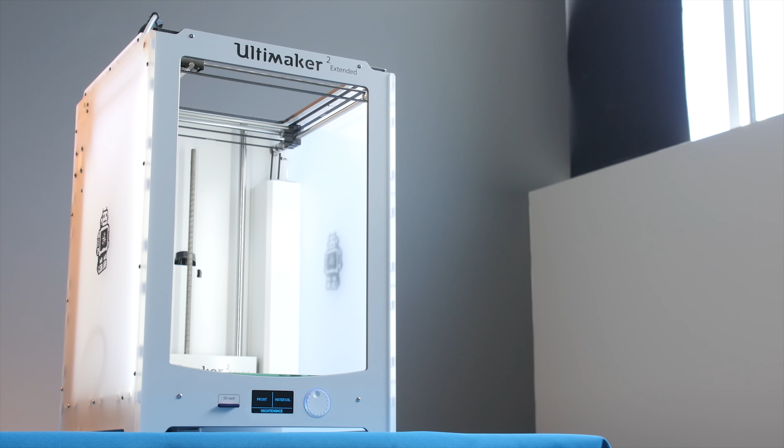We finally got our hands on a high-end FDM, or fused deposition modeling printer from Ultimaker called the Ultimaker 2 Extended. We're a little late to the game in terms of 3D printing, but that's because honestly, just printing from Shapeways was always kind of a great solution for us. Ultimaker offered to send us an Ultimaker 2, and it's kind of too badass to deny.

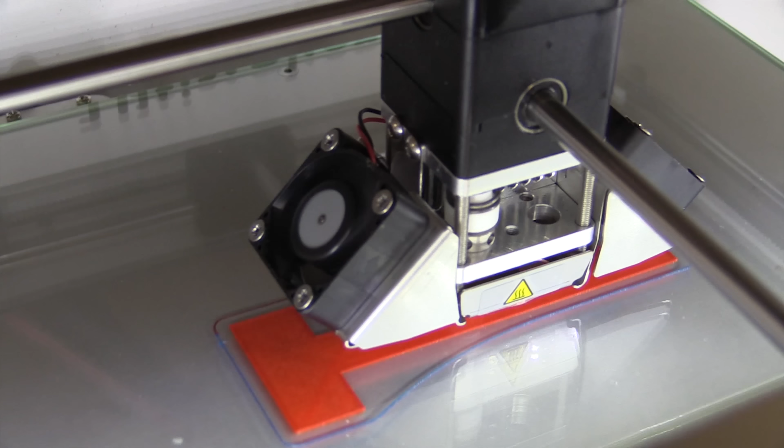So first off, what is an FDM printer? Essentially what happens is it squirts filament out of a hot end and lays down layers on layers on layers of this stuff to eventually create your modeled object.

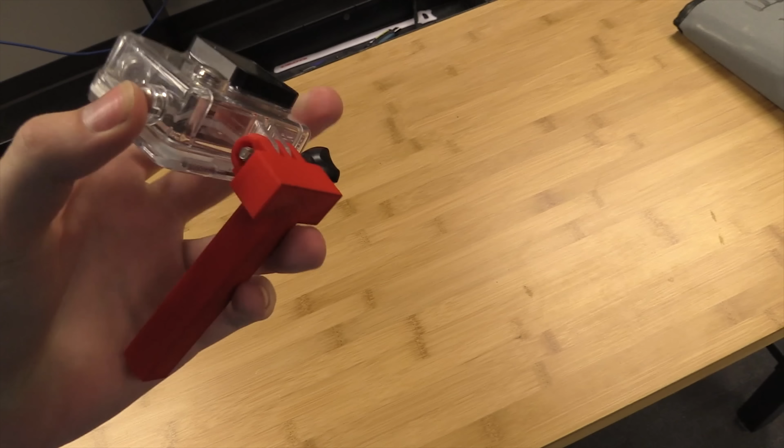This type of printer is typically what you would find for a home use style printing scenario, not necessarily industrial applications, as they would very likely have a much larger printer with a different printing style.

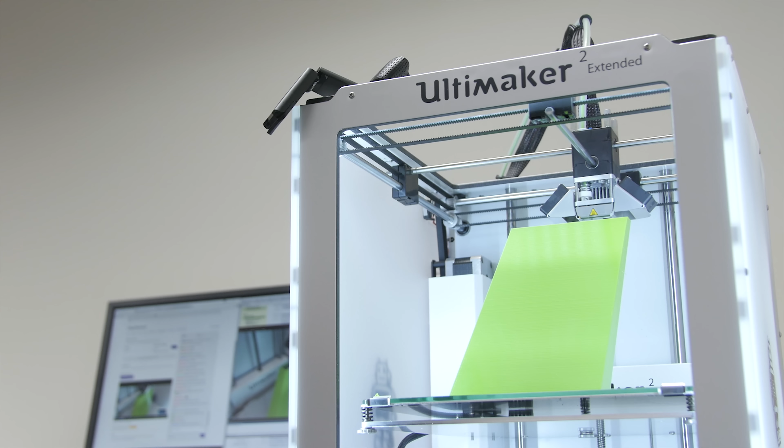That being said, this isn't a cheap printer. You could go pick up a cheap 3D printing kit for like $500, plus or minus a couple hundred. But when you get into the really fancy high-end printers like this, it can get really expensive. For example, this guy is about $2,700-ish US dollars.

With an expensive printer, you get a much bigger print volume, meaning the bed you print on is relatively large, and especially with the extended version we have, the object you can print can actually be quite tall. You also get a better print resolution in terms of speed and precision, so you'll get a better looking print in the end with less of those obvious levels from where it was moving.

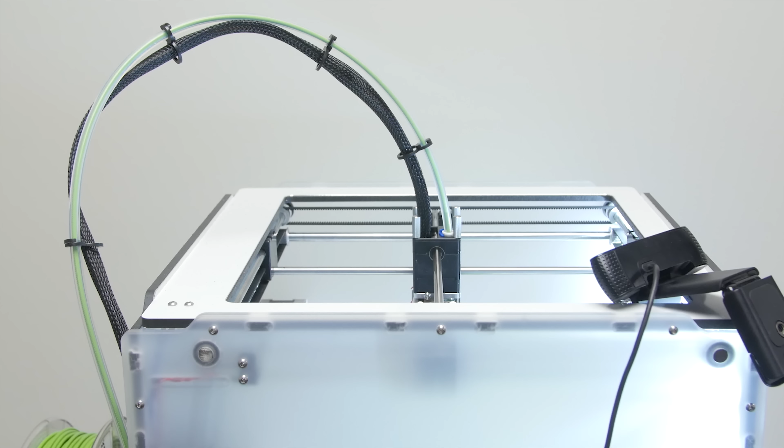You get a machine that doesn't make as much loud, aggressive noises. And then the rest of the improvements are largely going to be more subtle and hard to detect things that are actually still very important.

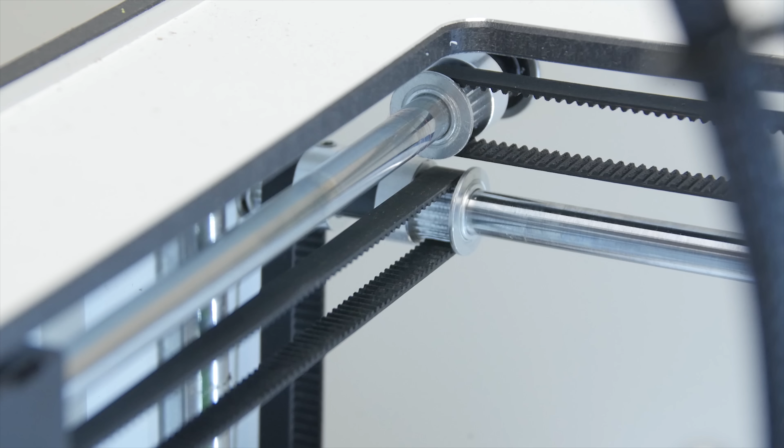Those things are like the specific bearings that were used, the hot end, the steppers, the belts and their tightness, etc., which will both contribute to the longevity of your printer and the quality of the final print.

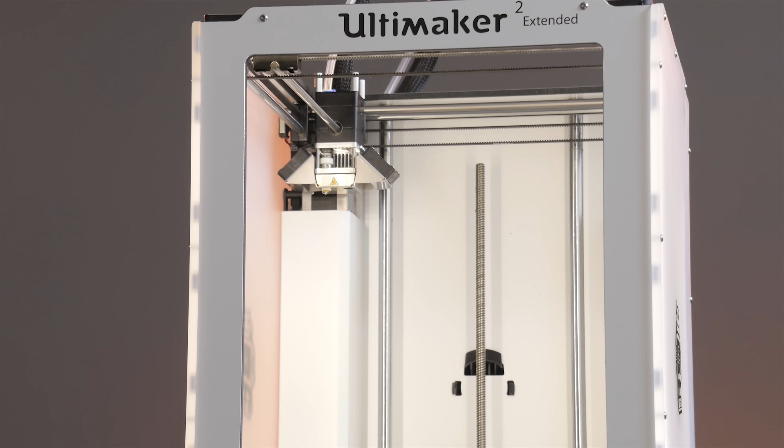I wouldn't say that the Ultimaker 2 is an entry-level printer. If it's your first foray into the 3D printing world, I might start with something cheaper, but for the high-end printing buff, this may be your target.

Now, without further ado, let's get to some printing.

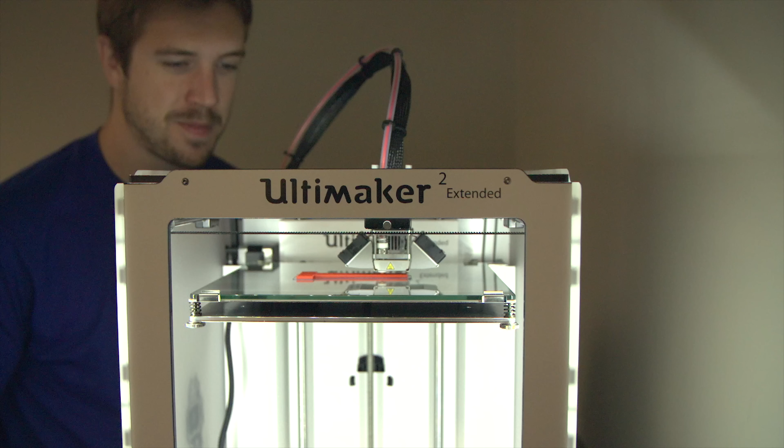The first thing I tried to print was a little GoPro handle. My idea for this was that it wasn't an overly complicated print for a first print, and it would actually be useful in our day-to-day work.

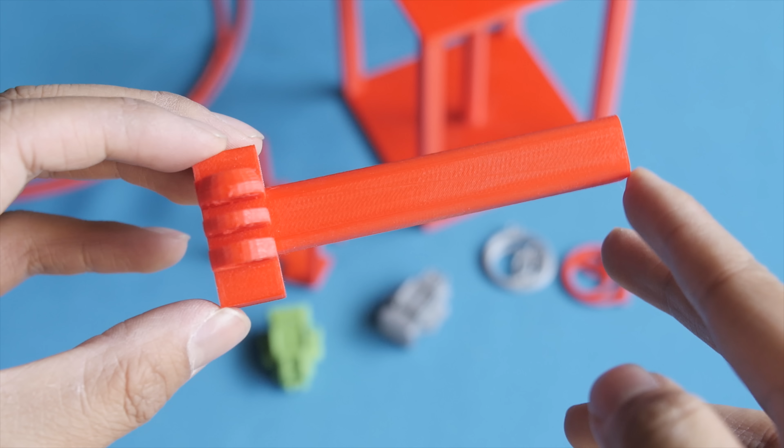On the modeling side of things, I just downloaded this model, but in the future I could just take the bit off the end that connects to the GoPro and model whatever I want behind it, so we can make specifically tailored GoPro mounts relatively quickly and inexpensively, which is awesome.

I created two of these, one at maximum quality and the other at minimum quality. The maximum quality one took just over 4 hours, minimum quality just took over an hour and a half.

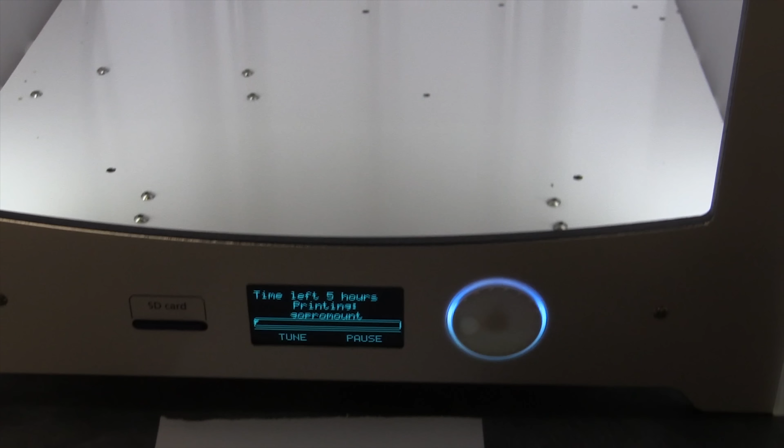One thing I'd like to note here is that the time the Ultimaker shows on itself is incredibly inaccurate, but if you're using the Cura slicing software, it will give you a pretty accurate time estimate before you start the print. Next up, we started printing the fire poles, which were conceptualized by me and then designed and modeled by Taryn.

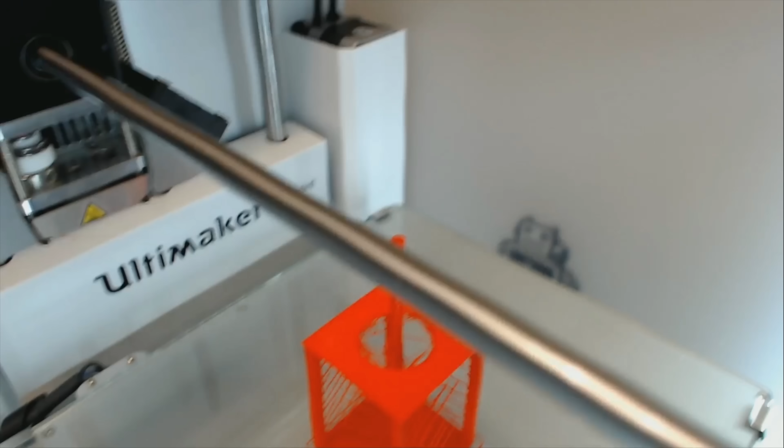The first one was a very small model that we built with scaffolding enabled. This was an interesting print because of how much of the print was extended over an overhang. The printer made quite a mess with the supports. After a very minor amount of work, I was able to cut the excess away, and the final product looked quite good, but it was still a little funky.

Next up, we printed one that was 4 times as large as the previous fire pole. This was an interesting print for a few reasons.

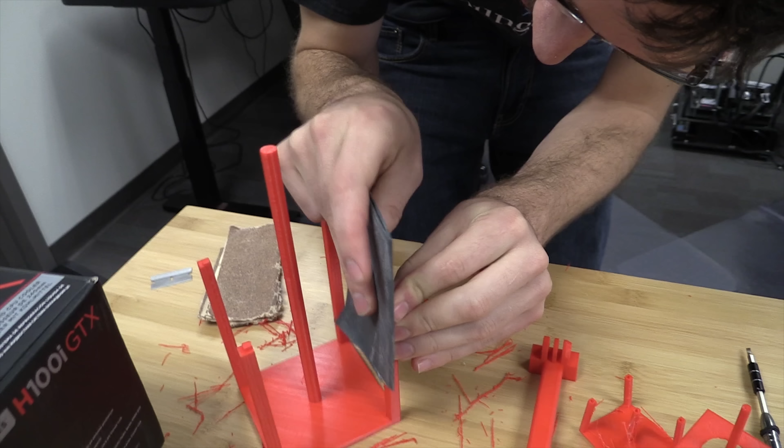I turned off the scaffolding and Taryn took the top plate off and built it on the side, which makes way more sense, while adding notches so that we could put it together later on. The reason for this was to avoid the scaffolding mess we had earlier and to see how accurate the printer was when making small, intricate notches.

And this last one, oh, look at that! Awesome, that's really good. It didn't take much sanding.

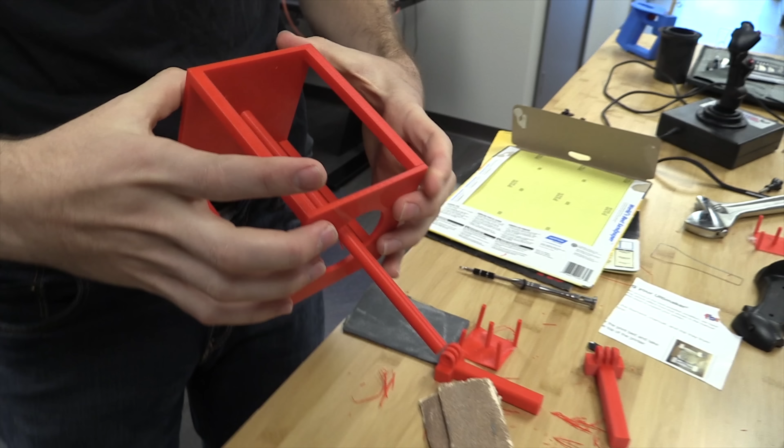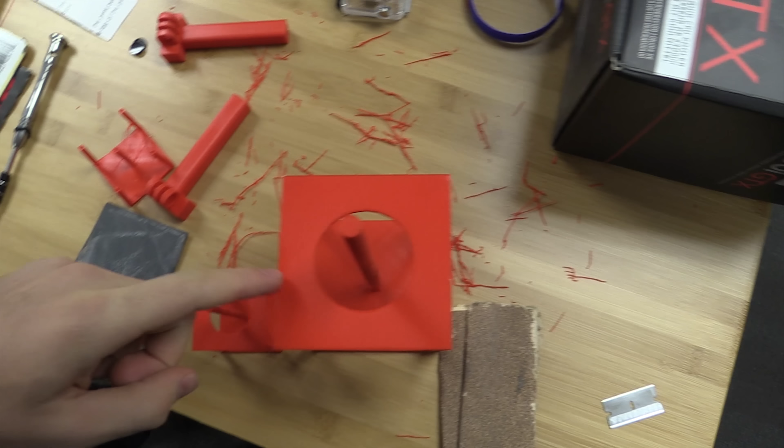The only issue we ran into here was the top of the fire pole platform sat on the heated bed for so long that it actually started warping. An unfortunate and avoidable problem if you take the right precautions, but I wasn't experienced enough yet.

Next up, we have the first part of a shroud that will be used in a build log Linus is doing for a 1U server. The shroud was conceptualized and modeled by Terran, and this print went on without a hitch, and it was impressive to see the printer deal with a slanted edge that easily.

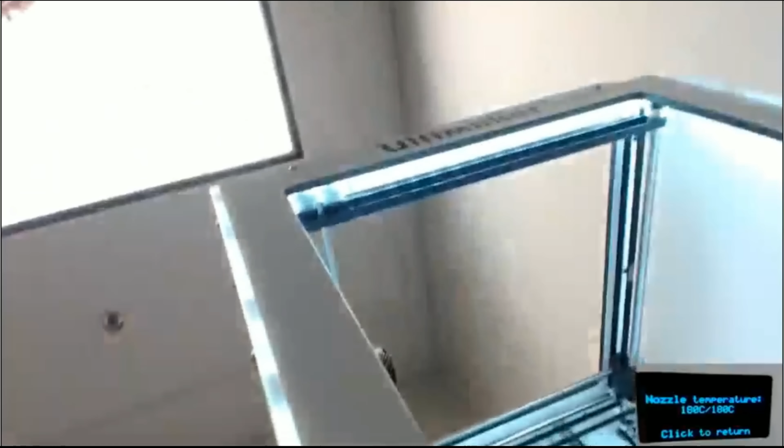Then I tried to do a few prints of some random things and change the filament before the last big print, which is where disaster struck. The printer started acting really weird, and due to my inexperience, I wasn't able to identify what was going on, and after about 5 hours of troubleshooting, I was getting close to giving up.

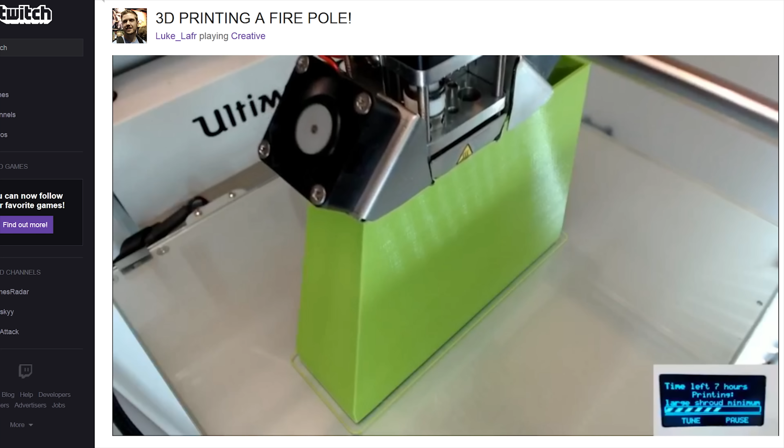There seemed like there was a separate problem with every part of the printer, but with the help of Twitch chat, who affectionately named the printer Darren, and had been watching for about 20 plus hours at this point, and specifically the user More Fiendly, I was able to finally solve the various problems that were going on and keep on printing.

I have to give Ultimaker a point here because even though I had a vast amount of inexperience, it was actually pretty easy to kind of take things apart and tinker with them to try to identify the problem, so that's pretty cool.

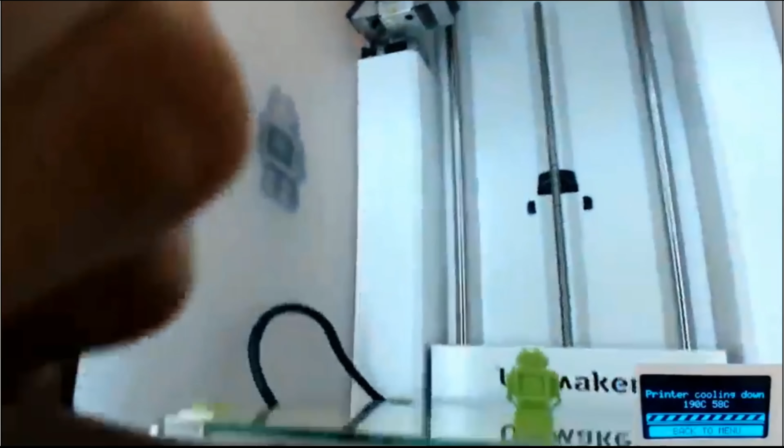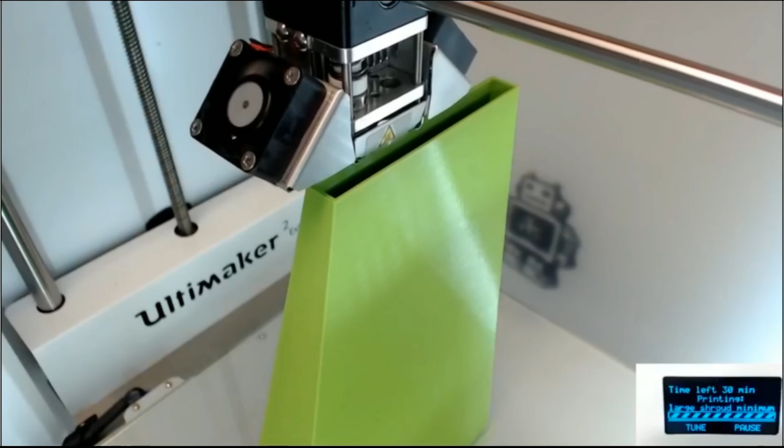The last leg on this journey was the large part of the shroud that I mentioned Terran had modeled earlier for the server. At this point, both I and the Twitch chat had learned a lot more about 3D printers and things ran smoothly, or are running smoothly, as there's still about half an hour left on that 18-hour print.

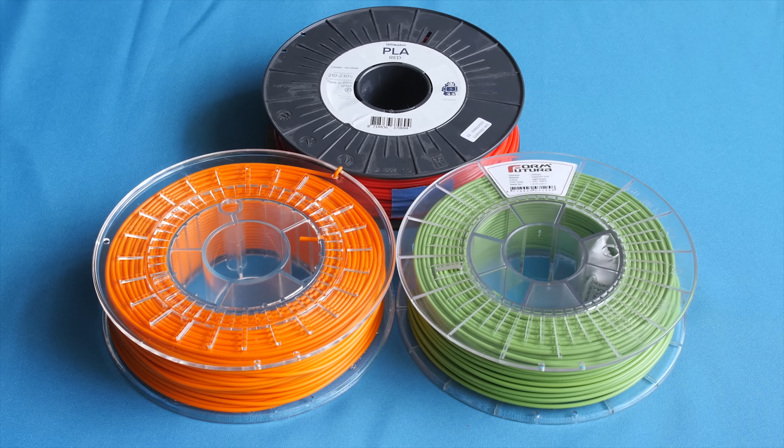In conclusion, 3D printers are great, but this whole process is rather expensive, and at this point, on the practicality or hobby side, it's definitely both, but I'd see it leaning more towards hobby. It will eventually be a practical tool for your house, but right now, unless you have the extra cash, I don't know. If you want to get ahead of the game, it might be a good idea.

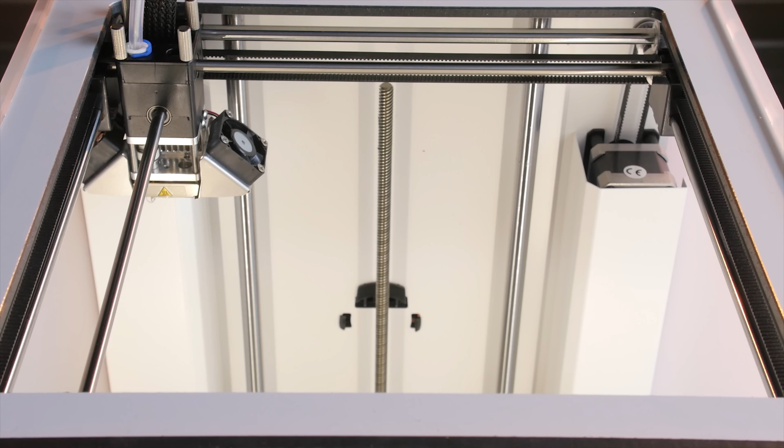I could see these being standard issue devices in people's homes in the near future, and I'm sure Ultimaker will be here to see that happen, as the Ultimaker 2 is a thing of beauty in both aesthetics and from an engineering viewpoint.